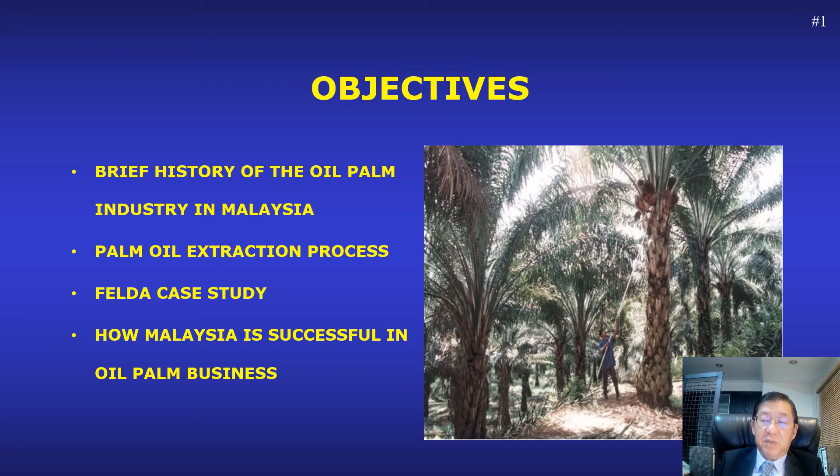I will touch on oil palm history in Malaysia, the oil palm extraction process, the FELDA development story, and a summary of how Malaysia can be successful in the oil palm business.

Now my first topic is on the palm oil history of Malaysia. The oil palm originated from West Africa. In year 1848, it was introduced to Indonesia. In the 1870s, the palm was introduced to Malaysia. Experimental planting started in the 1910s. In the 1960s, the Malaysian government included palm oil business as another source of national income.

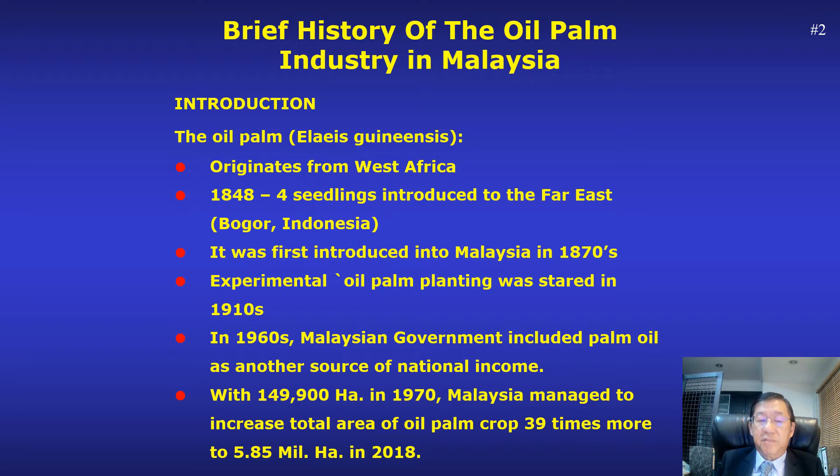From 149,900 hectares planted in 1970, Malaysia managed to increase total planted area to 5.85 million hectares in 2018. From 1961 to 2018, there's an exponential growth of oil palm being planted on our planet.

Do take note that Malaysia is number one until year 2008. They're being taken over by Indonesia thereafter.

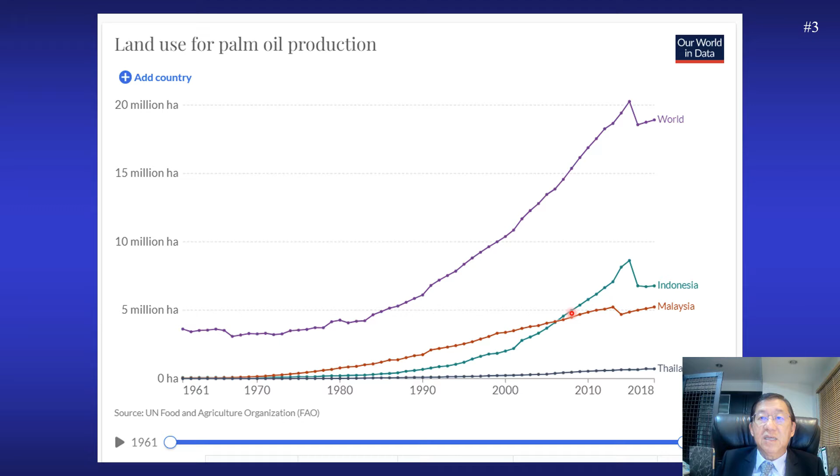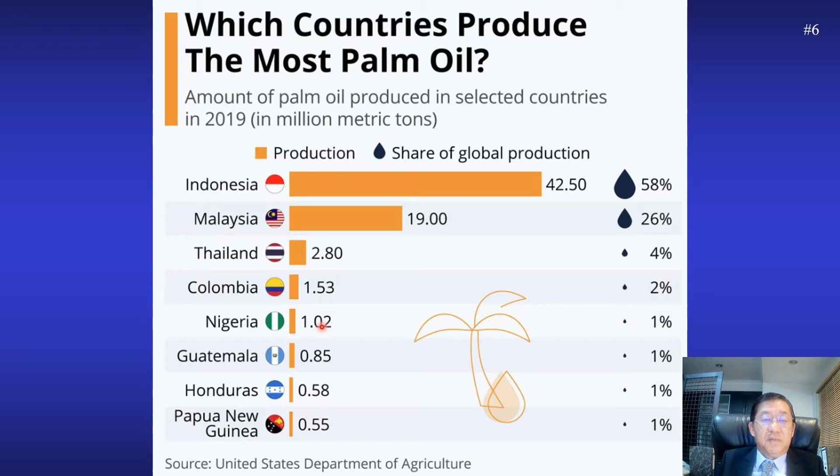Why is oil palm so highly in demand in the world vegetable oil market? This graph has the answer. In terms of oil yield per hectare of land, oil palm is the most productive crop on our planet.

Oil palm can yield 2.84 tons of oil per hectare per year, as compared to the next most productive oil, sunflower seed oil, which can only produce 0.71 tons per hectare per year.

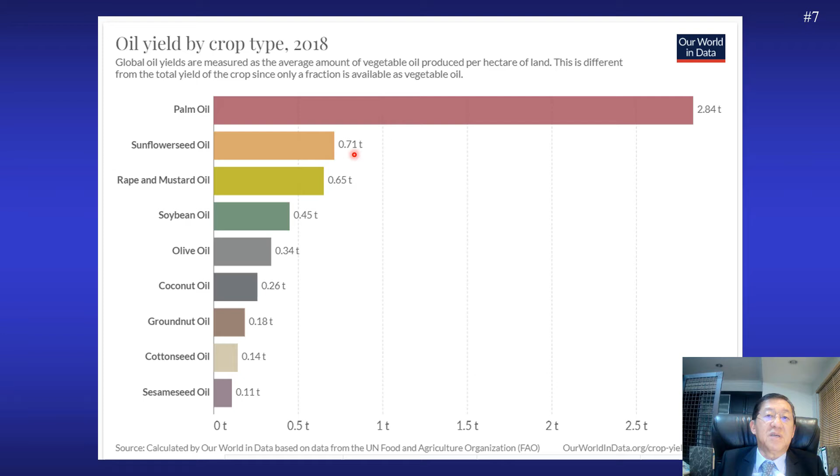How about environmental destruction brought up by Greenpeace movement and other competitors? The fact is there is no other means to replace oil palm for food supply, as shown in this graph.

Assume that only one oil crop is needed to feed world population in 2018. Only 77 million hectares of oil palm is required to feed the whole world population in 2018, as compared to its nearest rival, soybean oil, which will require 487 million hectares to do the same job.

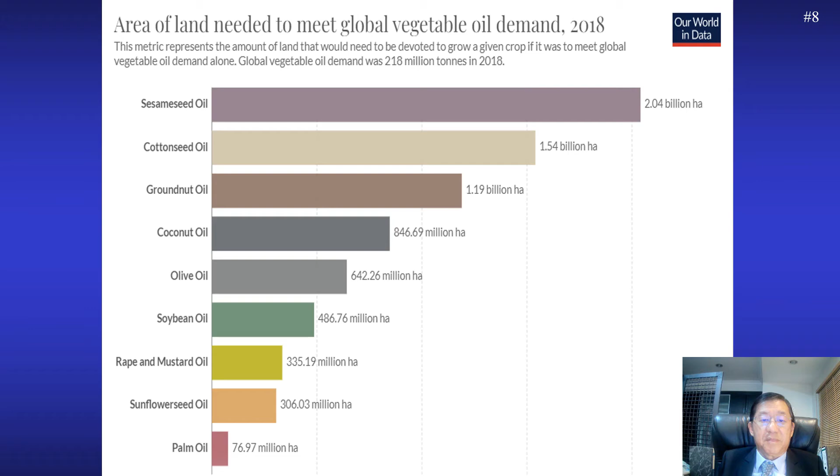Having briefly introduced background on oil palm, I now present how palm oil and palm kernel are extracted from oil palm fresh fruit bunches, that is FFB.

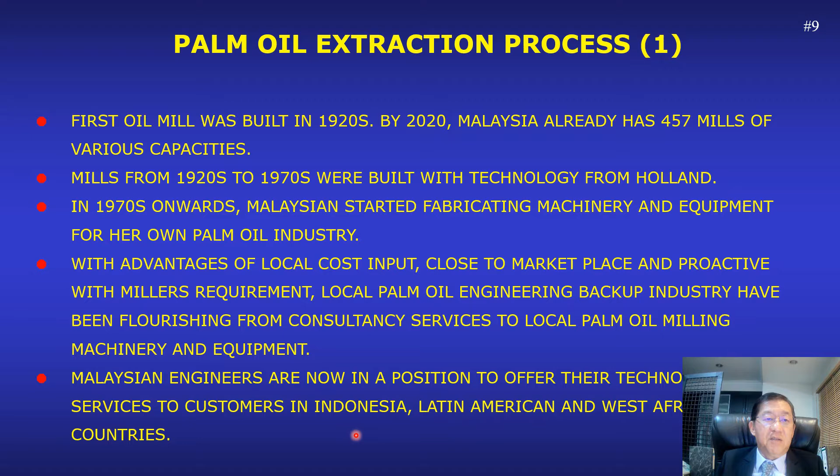From first mill in 1920, Malaysia is now having 457 mills of various capacity. Mills from 1920 to 1970s were built with technology from Holland. In 1970 onwards, Malaysia started fabricating machinery and equipment for our own palm oil industry. Malaysian engineers are now in a position to offer the technical services and expertise to customers in Indonesia, Latin America, and West African countries.

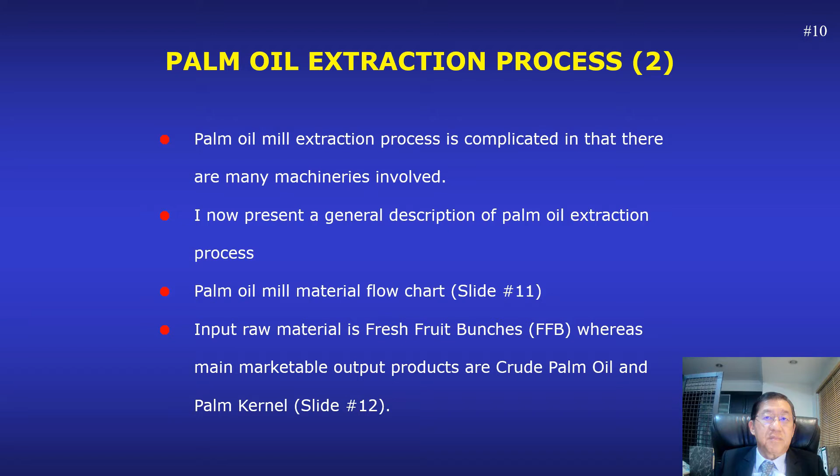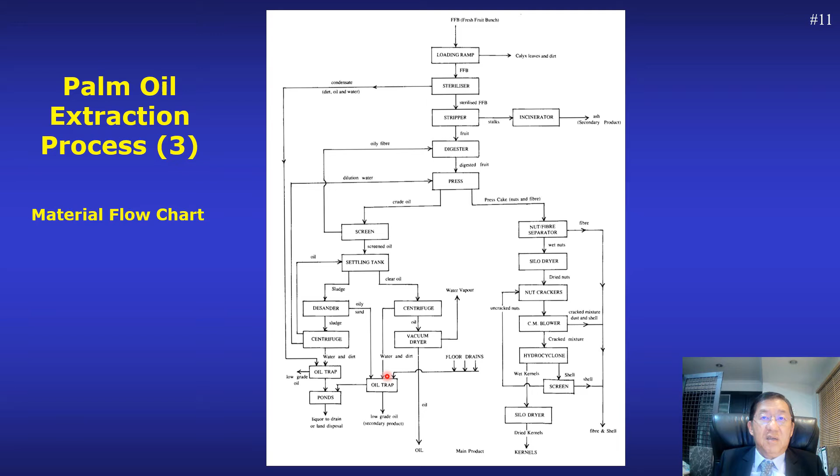I now go into general details of palm oil process. This is the material flow chart. The FFB, once harvested from oil palm plantation, are going through various treatment by process involving heating, sterilizing, screening, stirring, pressing, pneumatic separation, nut cracking, and clarification.

Final products are crude palm oil, palm kernel, and palm shell. Palm shells, being a byproduct, are mainly used for solid fuel for cement kiln drying and carbon black market.

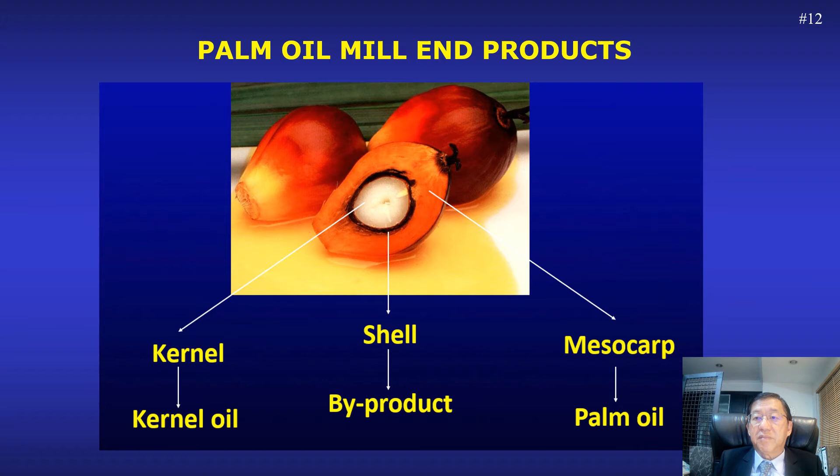Fresh fruit bunches harvested from plantation are transported by trucks or tractors to nearby mills. The fruits are stored in this loading ramp. The fruits are then transported by scraper arm conveyor to sterilizer station.

Fruits must be processed within 40 hours. If not, the oil will turn acidic or sour.

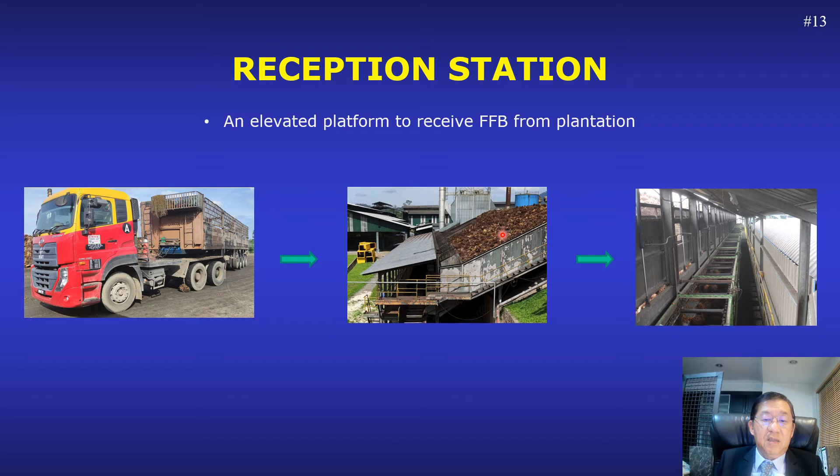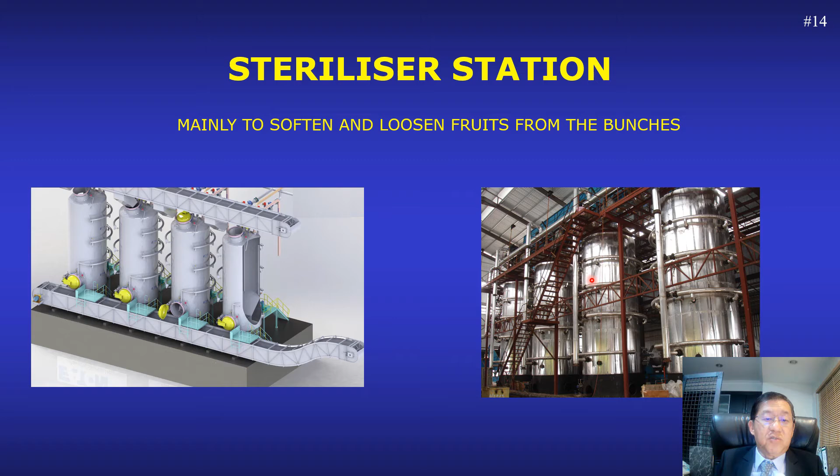FFB are fed by conveyor to the sterilizers. These are the sterilizing station, called vertical sterilizer. This sterilizer is to inhibit enzyme in FFB so as oil in FFB will not become acidic or turn sour. It also softens and loosens fruits from the bunches.

Sterilized FFBs are conveyed to thresher to separate into fruits and empty bunch. Empty bunches are solid waste that can be used for mulching for plantation or further processed to be used as solid fuel for steam boilers.

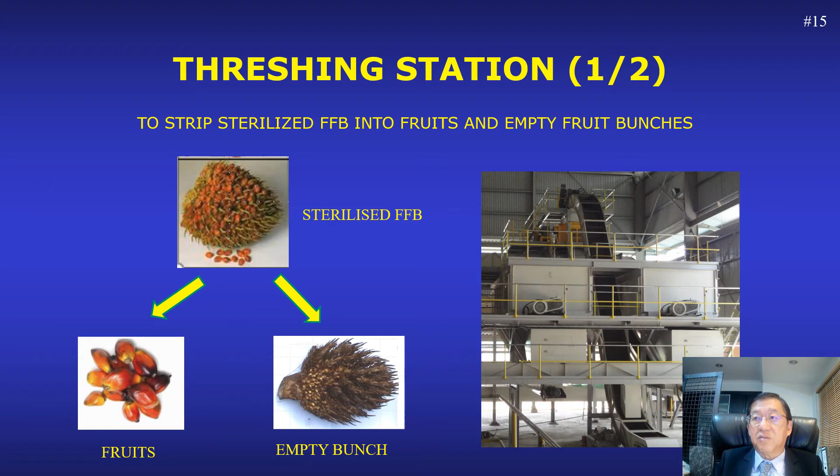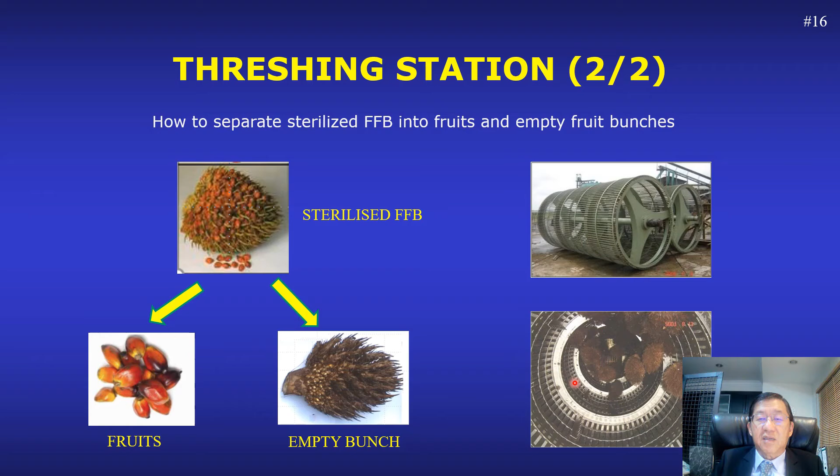These sterilized fruit bunches are threshed in this rotating drum. This drum will separate fruits from the empty bunch. The fruits will go through the slot here, while the empty bunch will be kept inside this drum while rotating.

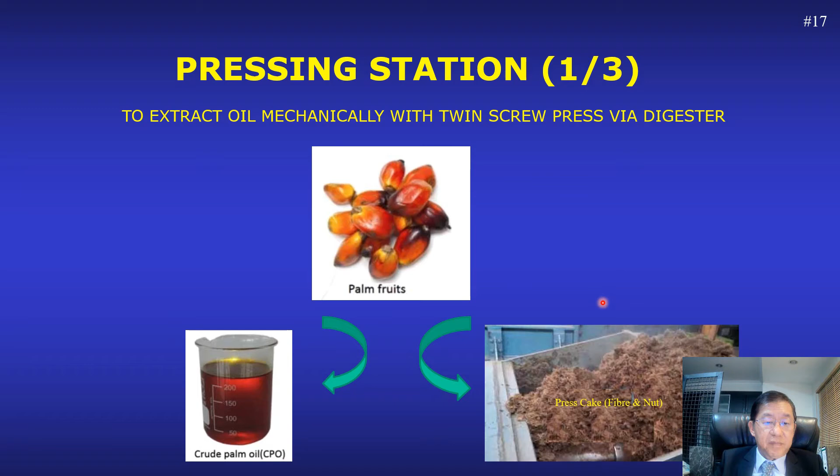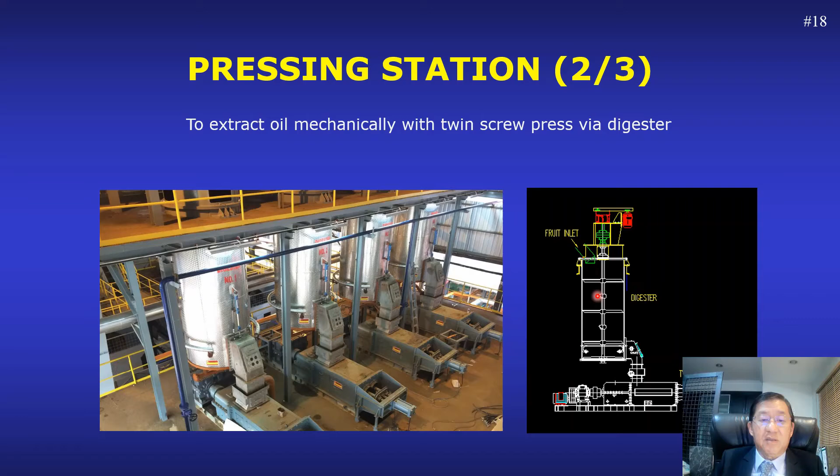The next stage of the process is to extract oil from the palm fruits. The fruits are conveyed to a digester to peel off the mesocarp from the nut. These are the peeling arms that take the pulp out from the fruits.

The digester mass is then fed into a screw conveyor, screw press. By rotating the two screws, oil is squeezed out from the digested mass.

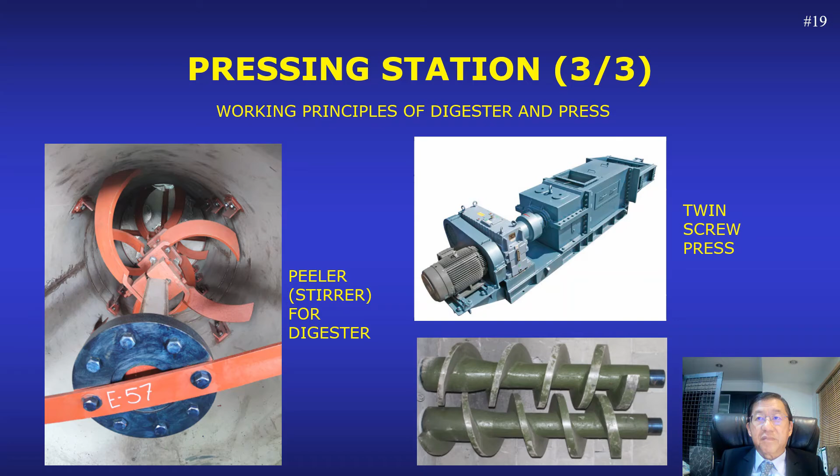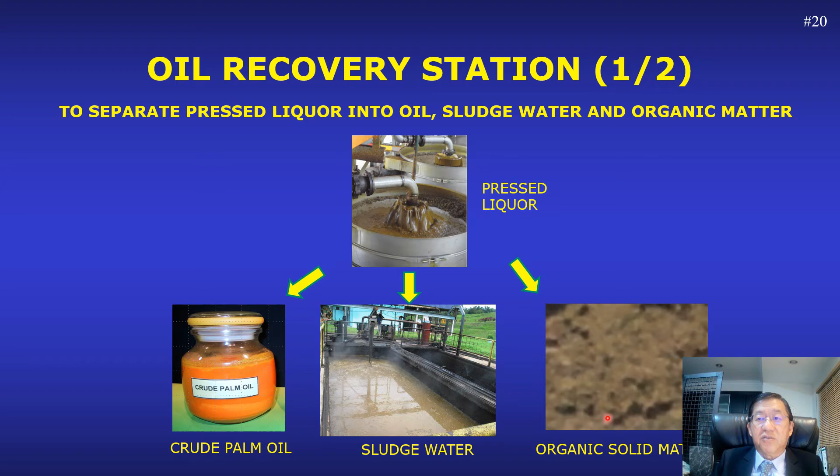We now have the press liquor from the screw press and the press cake. We will then have to separate the press liquor into crude palm oil, sludge water, and organic solid matter. We use clarification process via machinery such as clarifier tank, desander, sludge separator, and vacuum dryer to extract crude palm oil from the press liquor.

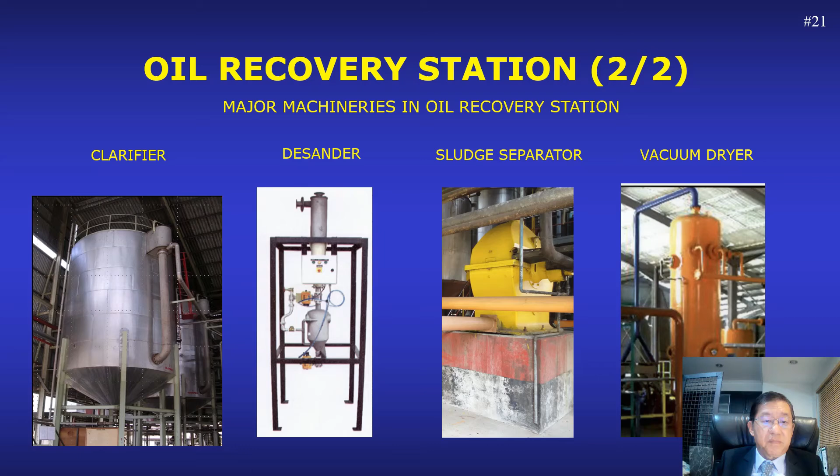Now for the solid portion, the press cake from the screw press, we use the depericarping and kernel recovery process to extract palm kernel from the press cake.

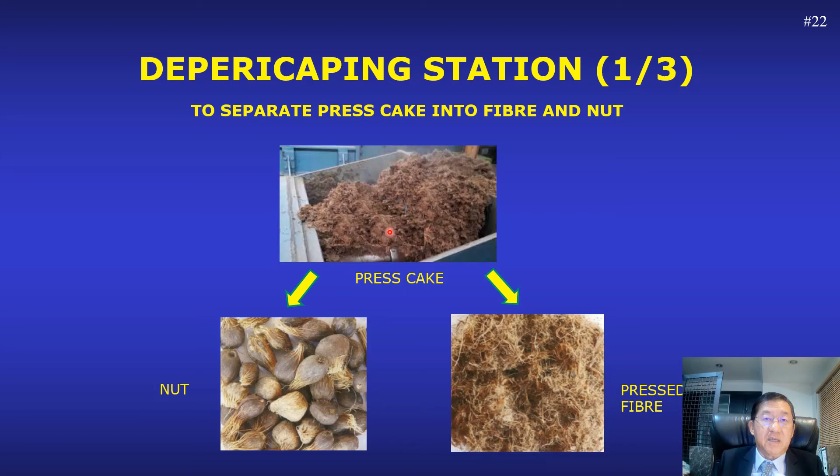This is a typical depericarping station. Its function is to get rid of the de-oiled pericarp from the palm nut. Press cake is being broken down into fiber and nut in this cake breaker conveyor.

They will then be separated pneumatically through a wind tunnel here. The nut will be further polished. The nut, being heavy, will come down and be further polished so as to get rid of fiber that are still stuck to the nut surface.

The press fiber, being lighter, will be carried by the pneumatic air into the fiber cyclone and to be burned in a boiler as a solid fuel.

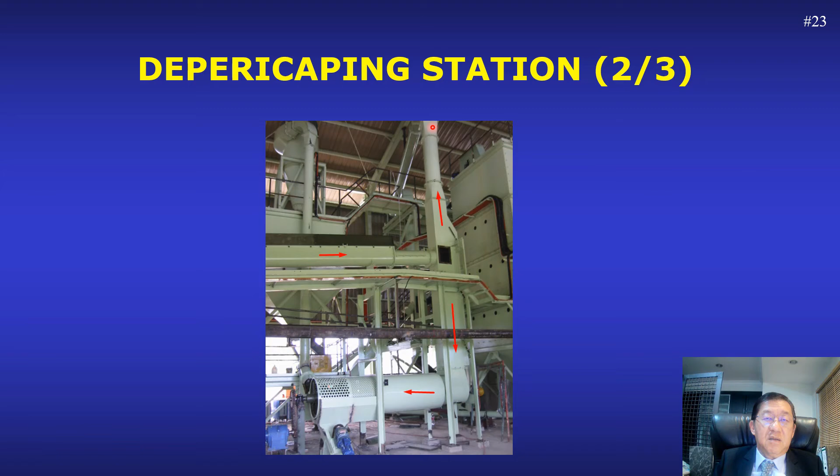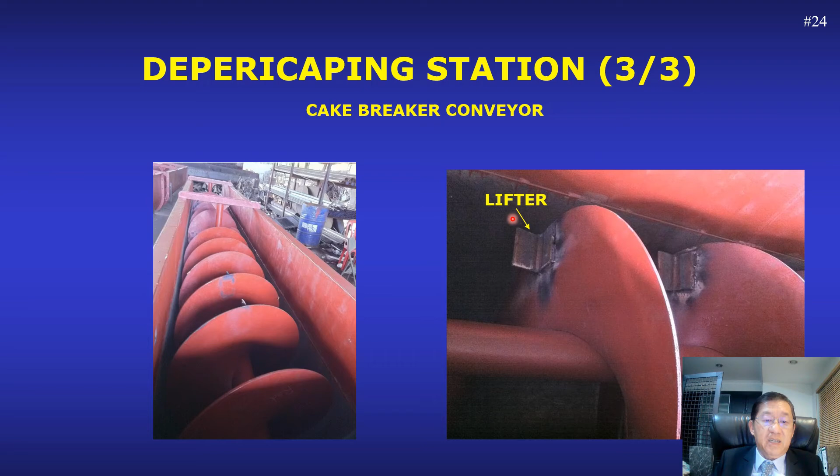This conveyor is designed with a lifter so as to break up the press cake into press fiber and nut. We now have to extract palm kernel from the palm nut and send the palm shell to the steam boiler as solid fuel, or to sell the excess palm shell as solid fuel for other industries or as carbon black raw materials.

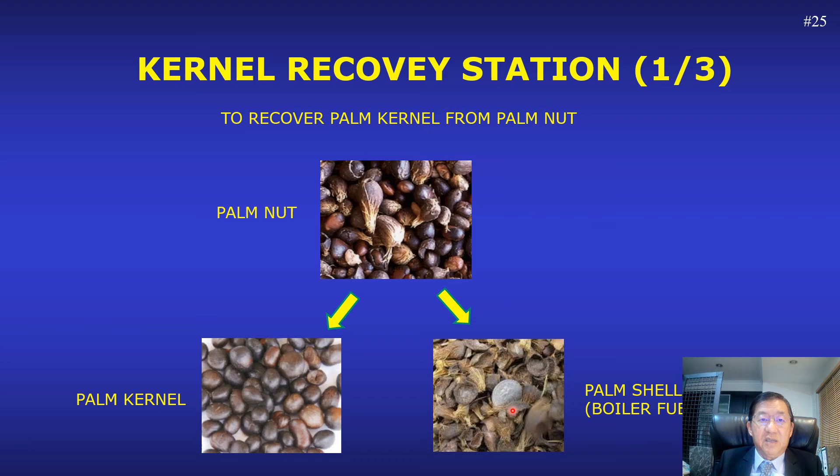This is a typical kernel recovery station. It mainly comprises of nut cracking machine, silo, conveyors, pneumatic separation column, ducting, cyclones, and hydrocyclone.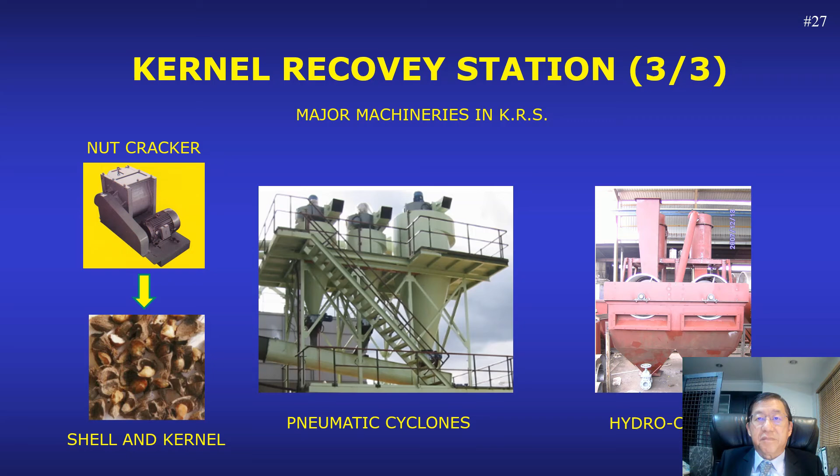Palm oil mill will require water, steam, electricity, and compressed air to operate the process machineries.

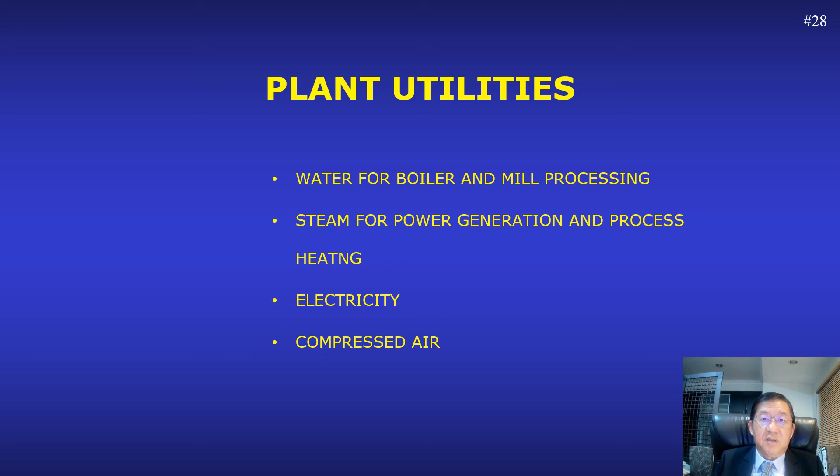As palm oil mills are normally located at the center of plantation, raw water will be sourced from nearby river or underground source. The water will then be treated as potable or boiler water.

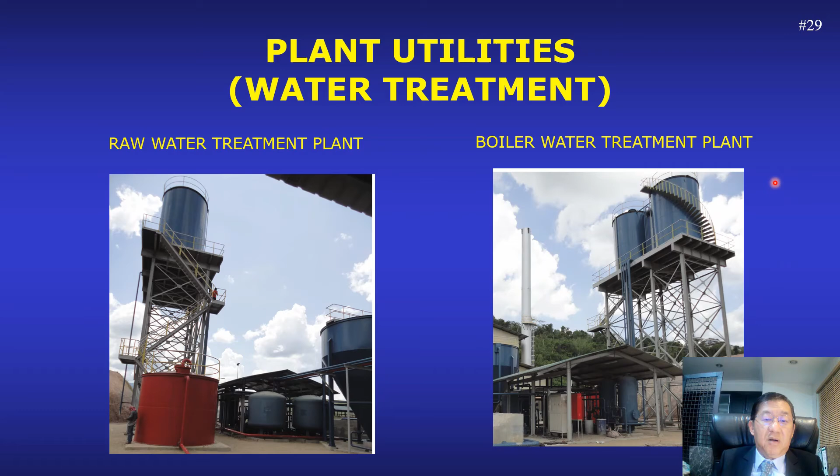Palm oil mill needs steam for both power, that is electricity generation, and process heating. Mills in Malaysia are now equipped with electrostatic precipitator to meet more stringent pollution control regulation.

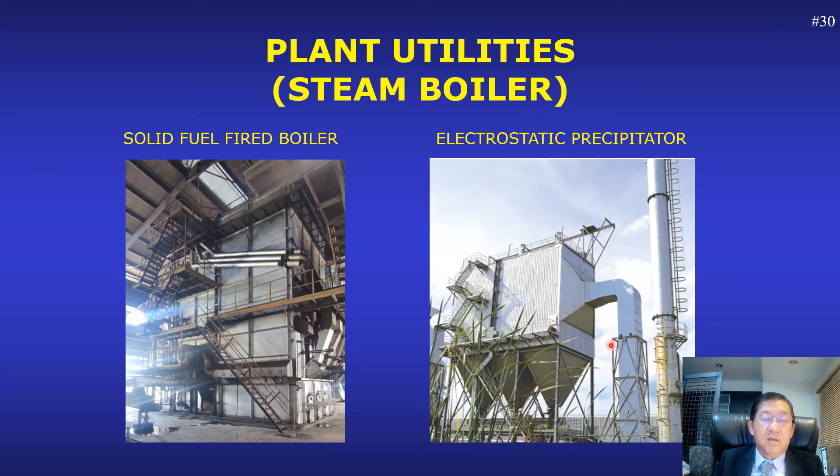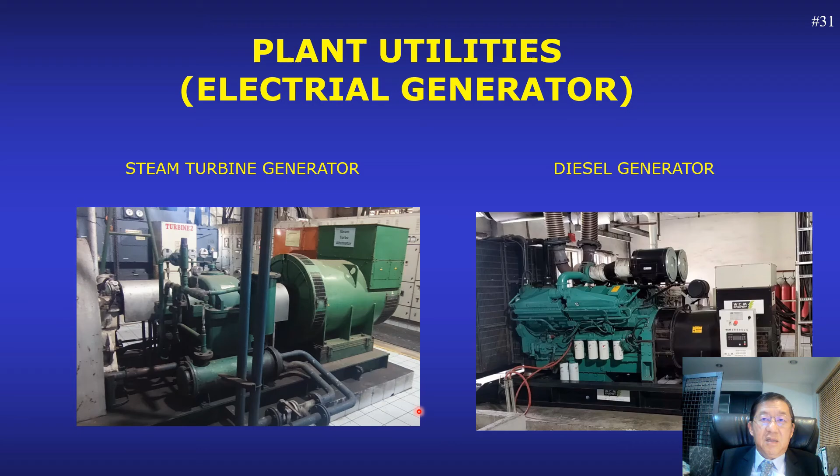Electricity is generated by means of steam-driven generator or diesel generator in palm oil mill. Now I need to stress the importance of fuel steam power balance concept. This concept is to be considered when planning a plantation from day one.

Palm oil mills generate solid waste such as empty bunch, pressed fiber, and shell. These solid wastes are burned in a specially designed steam boiler, not only serving as an incinerator to dispose of the solid waste, but also to generate electricity via steam turbine. Exhaust steam from the steam turbine will be used for process heating.

Mills that run on solid waste for power generation will have much lower production cost and hence be more competitive to other mills in the long run. A mill of 12 tons per hour capacity will have sufficient fuel from solid waste without having to rely on diesel-fired generators, thus meeting the fuel steam power concept of mill cost optimization.

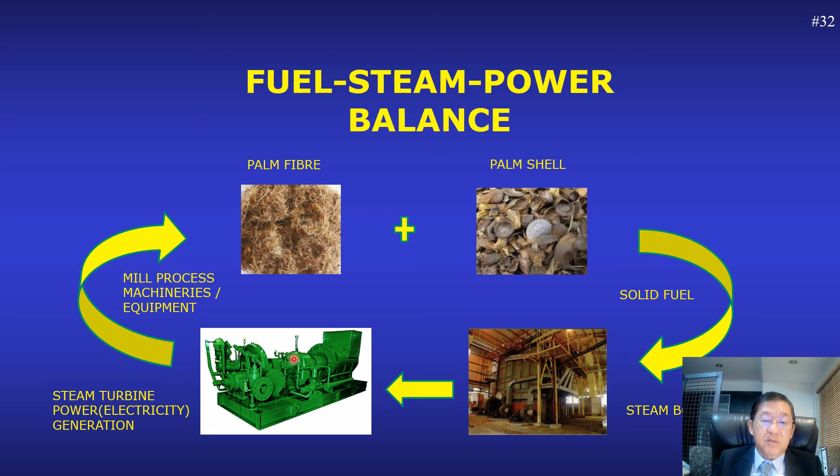Felda is credited in Malaysia to have changed the social and economic condition of the rural poverty-stricken community. Felda had resettled many rural poor into newly developed areas called Felda schemes.

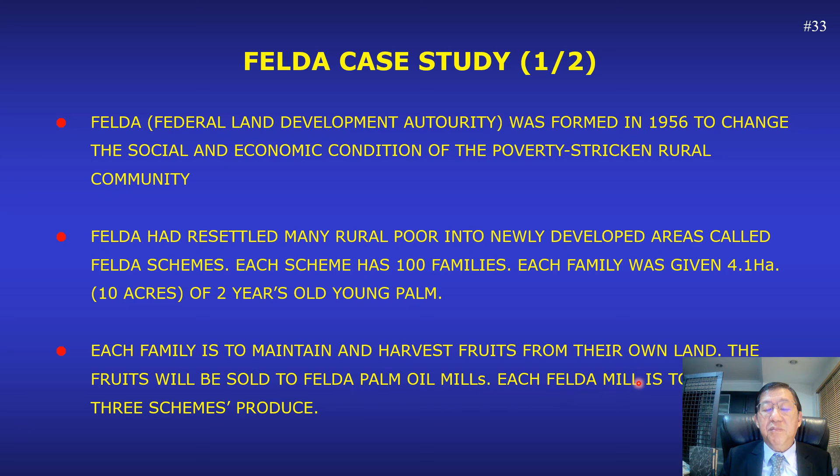Each scheme has 100 families. Each family was given 4.1 hectares, or 10 acres, of 2-year-old young palm. Each family is to maintain and harvest fruits from their own land. The fruits will be sold to Felda palm oil mills. Each Felda mill is to serve 3 schemes' produce.

Felda managed to lift poverty out from thousands of rural poor families. They are now able to access modern amenities, be self-reliant and self-managed. There are now 317 such schemes in Malaysia. Felda's integrated approach for palm oil development for landless people is a great model for many countries to emulate.

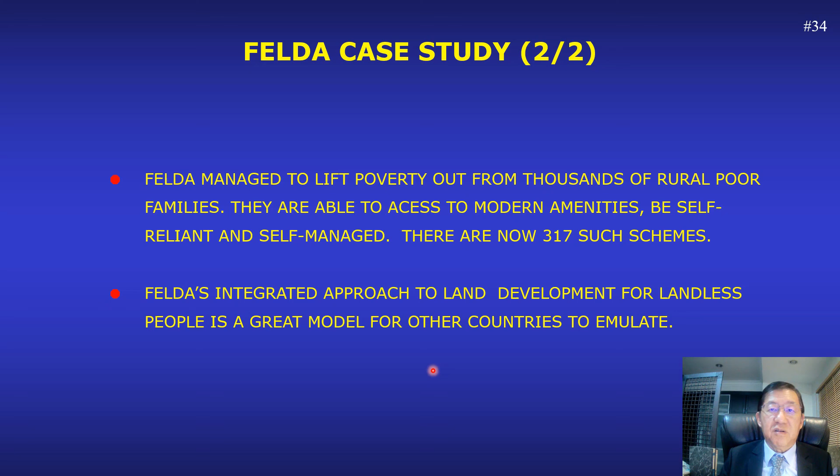Now, why is Malaysia successful in the oil palm business? Oil palm itself is the most productive crop on our planet. Demand for vegetable oil is in tandem with growth of world population and affluent lifestyle, especially in China and India.

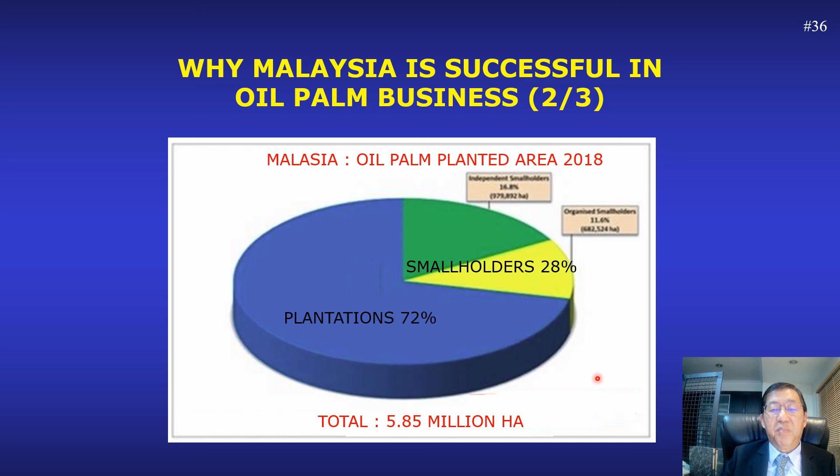Initiative was carried out by the Malaysian government to include oil palm as another business source of income, spearheading both public and private investment in this business. In year 2018, 72% of the plantations were owned by the private sector. The rest are smallholders and Felda scheme settlers. In total, there are 5.85 million hectares planted in year 2018.

Now, palm oil industry needs to add value. Besides palm oil mills, there are kernel crushers to turn palm kernel into palm kernel oil. There are 42 such factories. And then there are 50 refineries in Malaysia to turn crude palm oil into refined bleached deodorized palm oil, palm olein, palm stearin, and also refined bleached deodorized palm kernel oil, palm kernel olein, and palm kernel stearin.

We also have 19 factories making biodiesel. Palm oil can be used as biodiesel to be burned in combustion engines for cars, trucks, and even aeroplanes. In the event world palm oil price comes down so low, the Malaysian government will encourage the use of biodiesel so as to burn off all the palm oil instead of selling it at a loss to the world market.